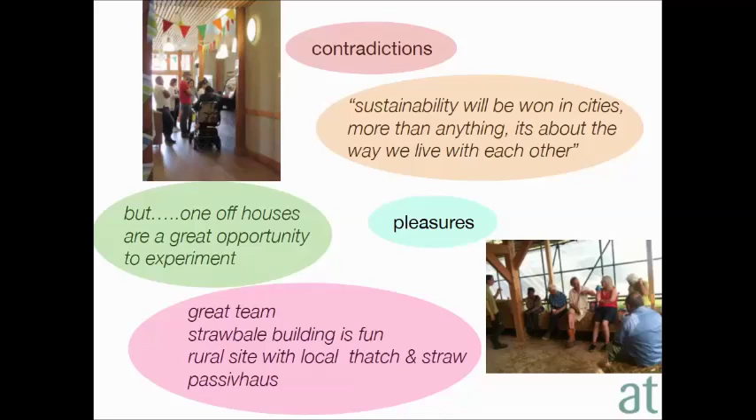And the pleasures obviously are that I took it as an opportunity really to work with all the people that I'd grown to know over my years of practice, and so it was very enjoyable working together. Straw bale building, like most forms of building together, if you can allow it to be, is really good fun. And we were working in Norfolk, which is where I've spent a lot of my life since I was a child, and these traditional materials of thatch are really just lovely to be able to work with.

The first straw bale project we did, which is like this one that I'm going to talk more about, was with Strawworks. I don't know if any of you've worked with Barbara Jones. This is a building in Lordship Rec, which is a little park just near Broadwater Farm Estate in Tottenham.

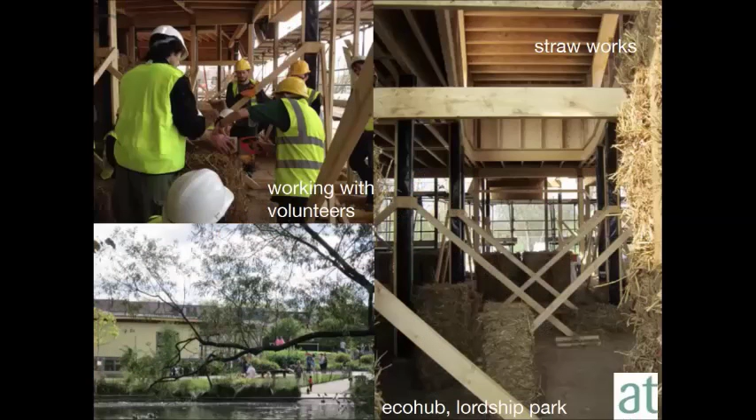And the brief from the amazing Friends group there was to build in straw bale, because they wanted people around the park to be involved in doing the building. And they were involved in doing that. And it was quite amazing to see this. It was a big park regeneration, so there was a very big contractor.

And it was really quite amazing to see how, when the timber frame was up and the roof was on, and these teams of local people came and worked over a period of about a month in week sessions with Strawworks, how the atmosphere on site changed and how many more people came along and asked what was going on, and how much they really got out of doing it, including one of the gardeners on the park.

And in fact, we started with knowing it was going to be a straw bale project, but we didn't know the size or shape or what the building was for. And there was a long process of participation in design as well. And that's something that we've really prioritised over our time of working.

And we found that enabling people to really contribute to the design process can be a really creative process, and that it can take projects off in directions that you really wouldn't have anticipated, and can provide very different and innovative solutions to problems which are sometimes solved in rather dull ways.

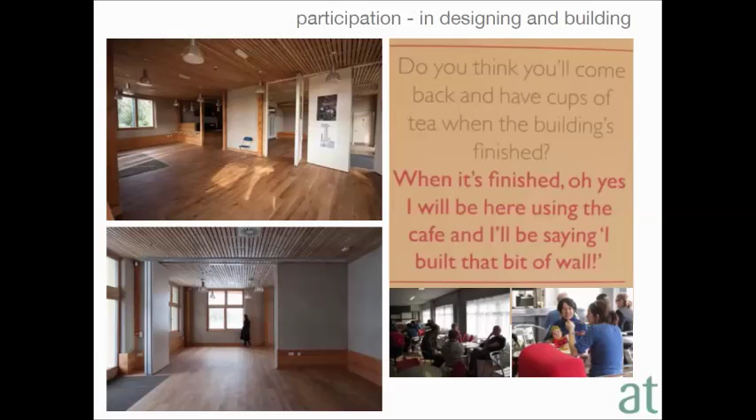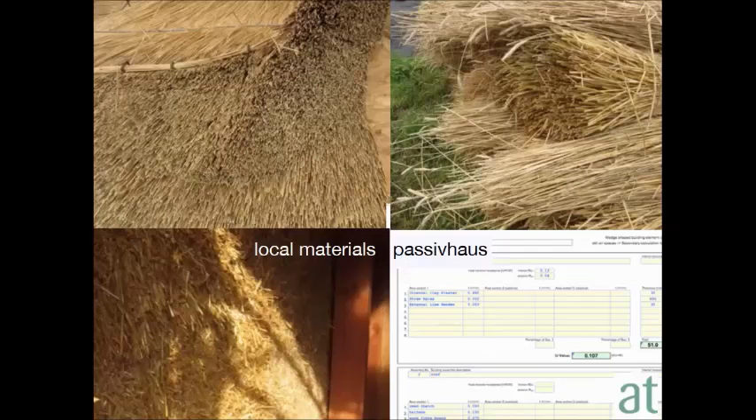Anyway, it was just at this time I was about to start this project, and I thought, right, obviously it's going to have a thatched roof, and this is the sort of buildings around where we were building in Norfolk, and it's going to be straw bale. And we're also trying to work very much within the passive house discipline.

Are you familiar with passive house? Who knows about passive house? Okay, that's great. So what I think is really important is it's a discipline which is looking for how you can manage energy. It's about energy. It's not about other kinds of sustainability.

And you can use the Passive House Planning Package, which is the design tool to calculate the way that you're using energy in the building. It's a fantastic tool. So 10 years ago when we were doing retrofit projects, we were wondering if you put insulation here, what's going to happen and so on. And we said to people, could we model it? And it was too expensive to model, and we had to do it and then measure and see how much energy you'd saved.

With PHPP, you can really explore if you've got a bigger window here and a smaller window there, how does that work? Or if you have more insulation at this end, or if you change the shape of the building, you can really look at what the implications of that are. And it really is a very good informative tool as you're working through the process.

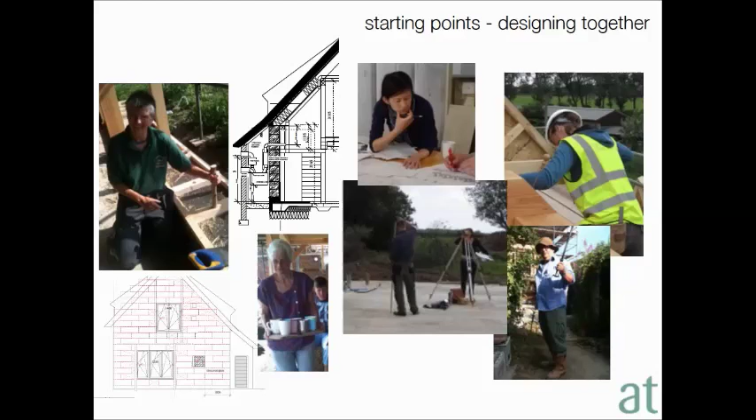Our airtightness consultant was Paul Jennings, who's the AECB airtightness guru. Barbara Jones on the left, our straw bale person. Fran Bradshaw is the tea maker, and Junko is one of the designers at Anne Thorne Architects who was working on it. So it's a very, very simple building.

A primary Douglas fir frame, self-supporting straw bale walls. Some of them are really quite large panels of straw bale. Windows anyway are heavy and need to be in the right place, but once they're passive house windows, they're triple glazed and they're really, really heavy. And obviously all windows need to be plumb and level, but passive house windows really need to be plumb and level.

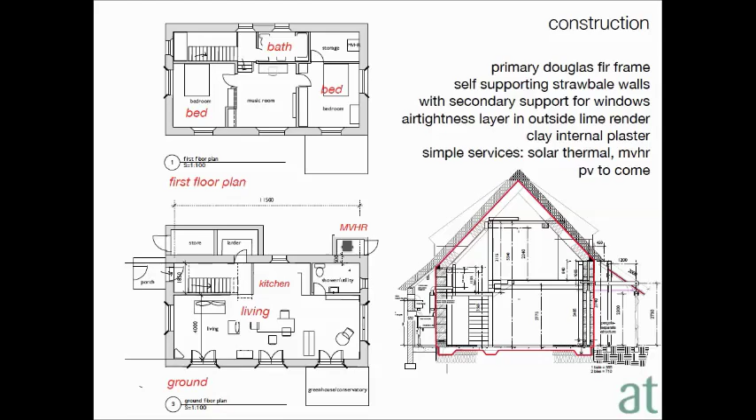Our airtightness approach here was that the outside layer was going to be the airtight layer, and that didn't work very well. We'll go on more about that. And then clay plaster inside and lime render outside, and very simple services. So the work really went into the fabric, but mechanical ventilation, heat recovery, and solar thermal. And this is the timber frame.

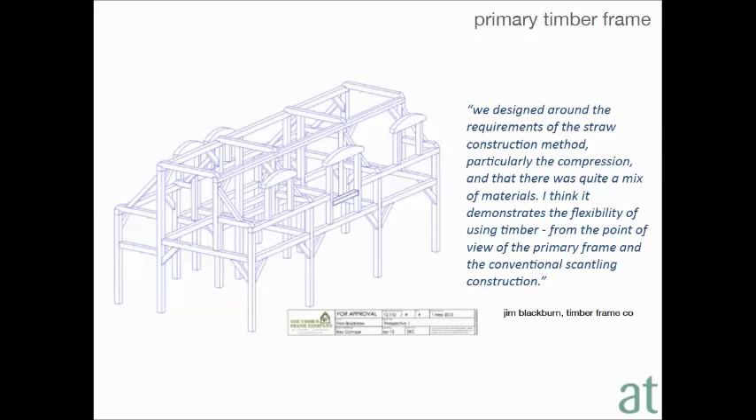So one of the things that was really interesting was working with the straw bale people and the timber frame people together. One of the things about straw bale, if it's not load bearing, is that you need to compress it within the frame. And so what we designed here was a primary frame where the first floor was projected with a compression plate underneath it that we could use to compress the straw bales. It's not until the straw bales are compressed that the wall becomes rigid and substantial.

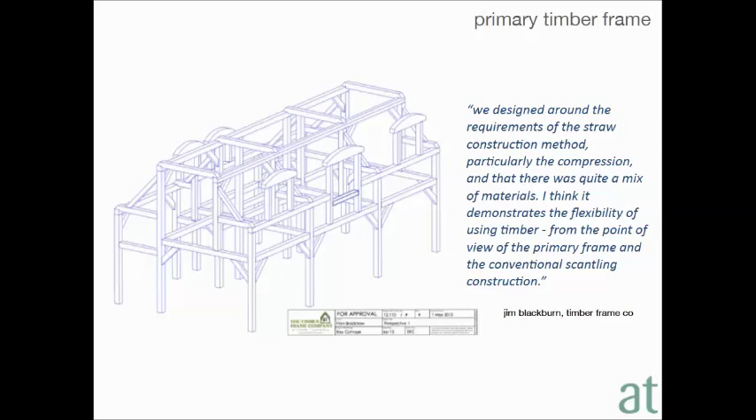And that was quite an interesting new system that Jim hadn't done before, or Barbara, and it worked really very well on site here. And it's been very stable in terms of movement.

So at the same time, obviously, we were developing the PHPP model. Actually, we were really lucky because straw has quite different thermal properties depending on which way it's baled. We didn't actually realise this when we were getting the bales. But as soon as it's explained, it's pretty obvious that if the tubes of straw are going horizontally, then you've got more possibility of conduction through the bales. But if they're going vertically, you've got a better insulation value, and that's to do with the baling machine.

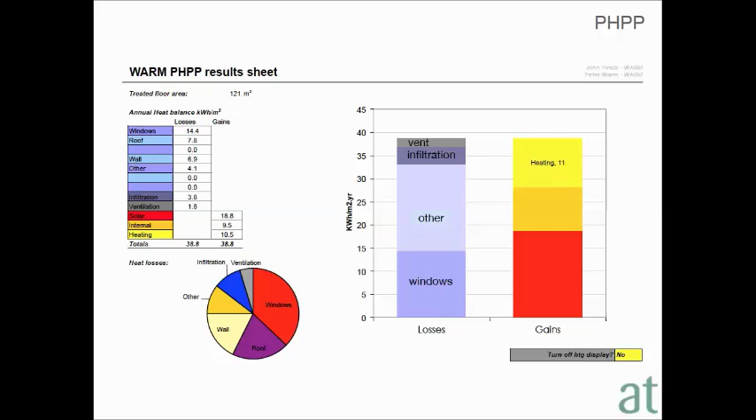In straw baling, the tightness of the baling is actually the key thing. Somebody said to me at Lordship Park, "Oh, is this the really traditional way people used to build?" And I was explaining, no, it's not. A straw bale is actually an industrial product, and it depends on really tight baling. And this is very important when you're building with bales, that you've got very tightly baled straw that you can really compress.

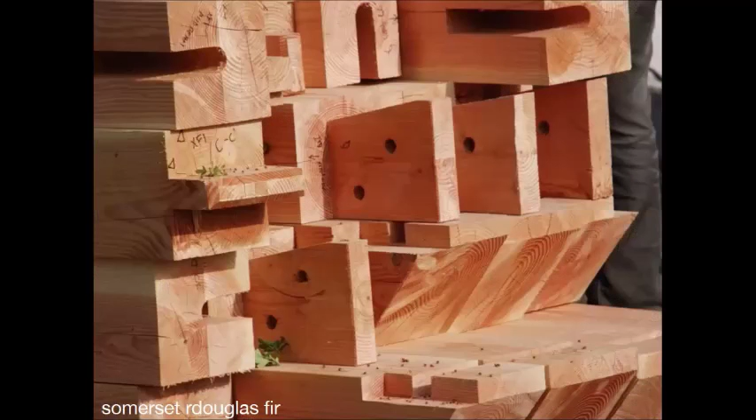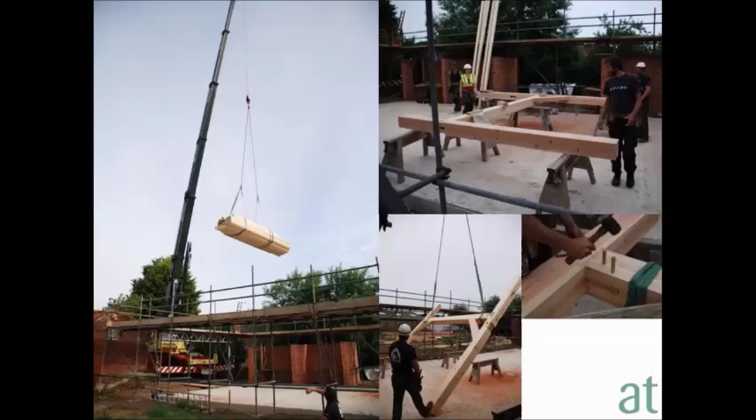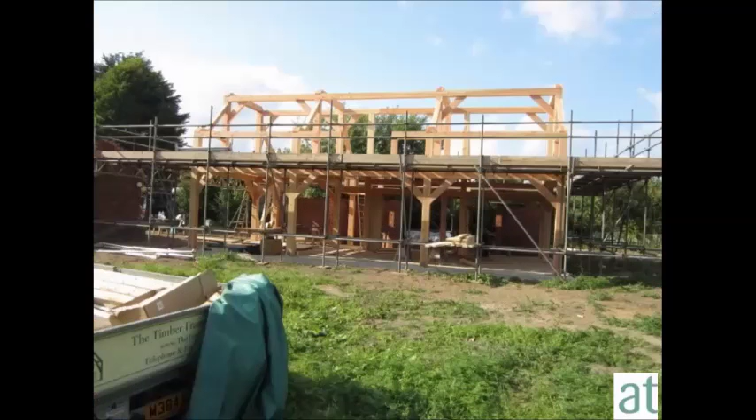This is the Somerset Douglas fir arriving on site. They had cut it and made it all up in the workshop, and then brought it in a big lorry. Here it is arriving with a massive crane. So this very traditional kind of frame making suddenly became very high tech. It arrived on a lorry, the crane went up, and it was really lovely to be part of this process of putting this frame up. And you can see the A trusses for the roof going in there.

And then we had a raft foundation for various reasons. But we wanted to lift the straw up off the concrete, partly because of water damage, really, that it was important to get it up off. And we were here using foam glass, which again is a highly processed material, but incredibly effective in this particular location. And foam glass blocks are actually exactly the same width as straw bales, which is convenient.

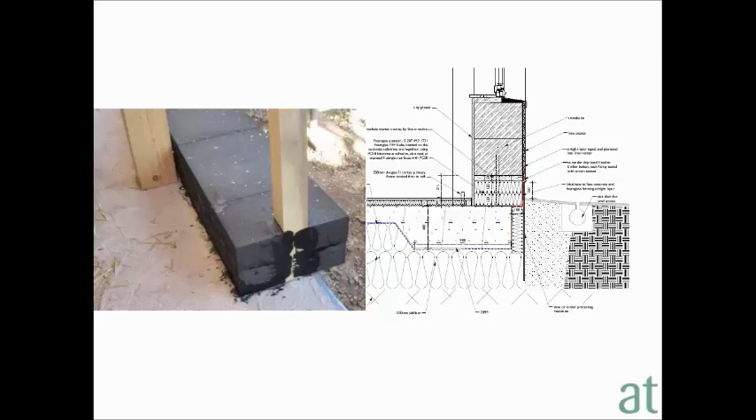And here are the first lot of bales arriving. What we found with the straw baling was that working with a couple of people who are really experienced and know what they're doing, all your friends and family can come and join in, and it works really well. And as soon as the experts aren't there, suddenly everything falls to pieces. So I think that's a really special thing about straw baling, that it really lends itself to community projects and doing it together.

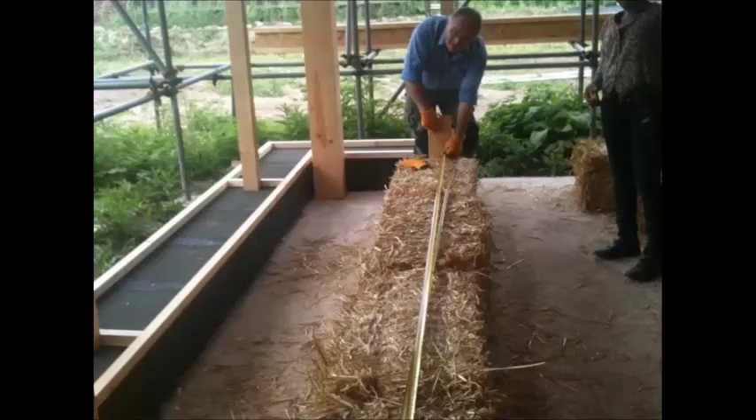Just all the sort of techniques of cutting bales and measuring them out according to a very carefully designed straw bale plan, pegging the bales together. So they're reinforced with hazel pegs down through about 3 bales. On the left, you can see the starter bars, really.

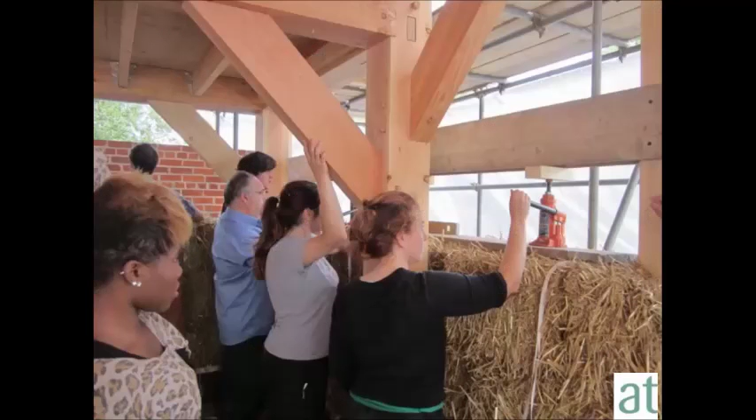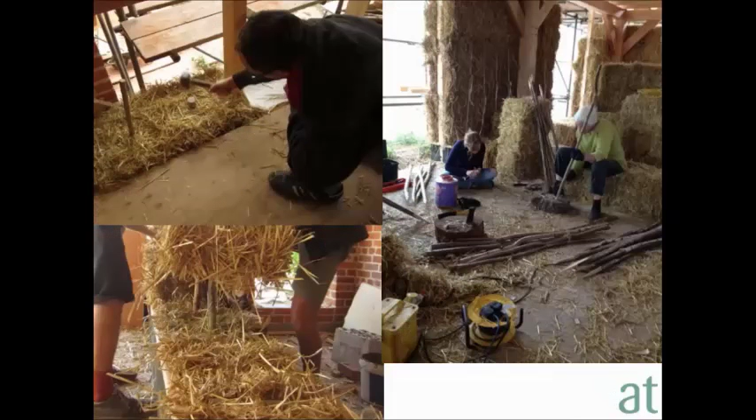And then this is doing the compression. So Barbara just uses car jacks, and you can see in this case, this is sort of halfway up the wall. So she's compressing against a kind of temporary frame. And I think later on you can see you compressing against the expanded first floor roof. The straps are then tightened, and then you can take the jacks away and then go up a bit further. Here we are doing the hazel stakes.

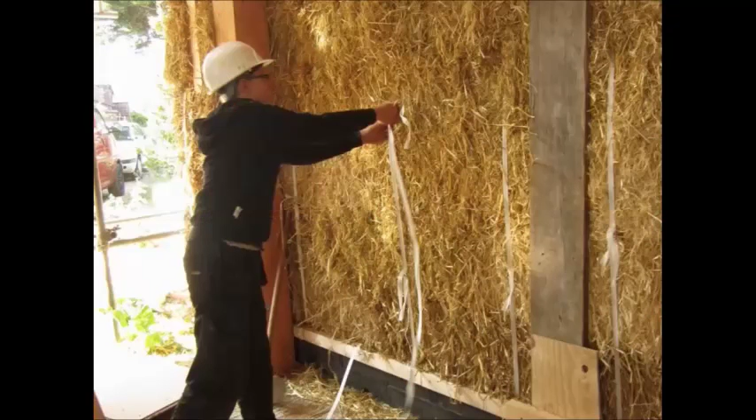And here you can see this top one here, the sort of lattice of the compression plate, so that's up to the first floor, and then these are the kind of complicated bits, the sort of stuffing in corners, and it's a highly technical matter that we had to have carefully explained to us. It's taking the straps off.

We've put little monitors in the straw bale. We don't really know enough about how straw bales really function, and particularly we don't know enough about moisture and how it passes through the wall. And the AECB uses an Omnisense hygrotrac system, which is now being used across a range of different projects, so that we've got very comparable data. This is the only straw bale one that's being monitored at the moment, but across other projects. And so we put the monitors in various different places in the walls and on different orientations. And that's been giving us really useful information back about how it's performing.

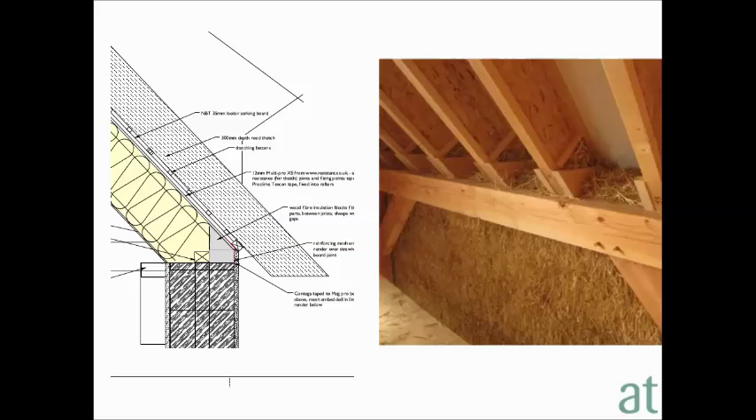And so these rafters were filled with paper fibre, and that's a really nice, straight connection from wall to ceiling.

With thatch, you have to have a fire board underneath the thatch. It's a different way round, really, from how you normally think about fire. And so what was important here was to be able to use the thatch for its thermal value. It's got quite a significant thermal value, but air needs to be able to pass through it. You don't want any kind of condensation in the roof. So these calcium silicate boards are vapor permeable, and what it means is that the whole roof construction with the insulated joists underneath and the thatch on top can form one incredibly thick warm roof.

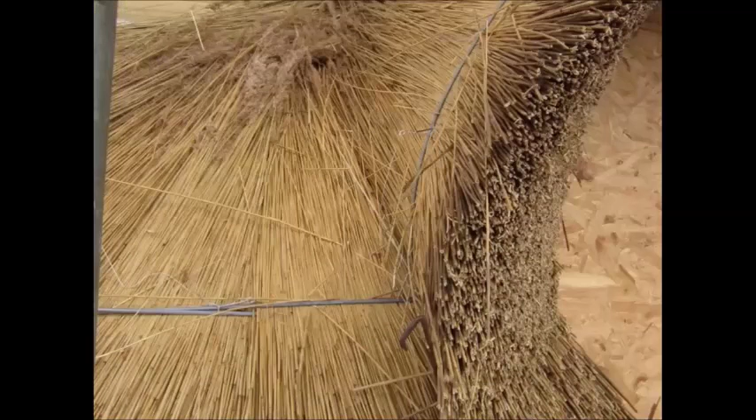And this is the thatcher's tools. The thatcher and the straw bale people were really interested to look at the different tools that they were using, all made for their particular work. And I really thought it was interesting, before the straw was rendered, this kind of shaggy building that came out.

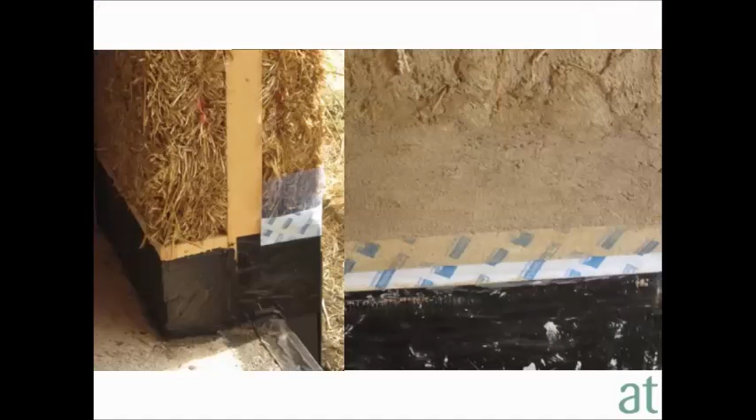This is the kind of where we're going for something which is really quite high performance, and these kind of shaggy materials. There are difficulties about doing that, which was what we were trying to explore, and we did have difficulties. We haven't achieved Passive House because we haven't quite achieved the air tightness target, although very nearly. And that was partly because we had some tape failures externally, and it wasn't really very easy to identify that had happened.

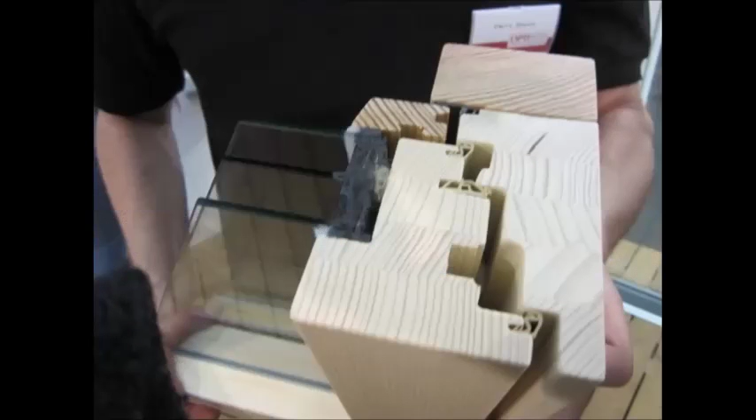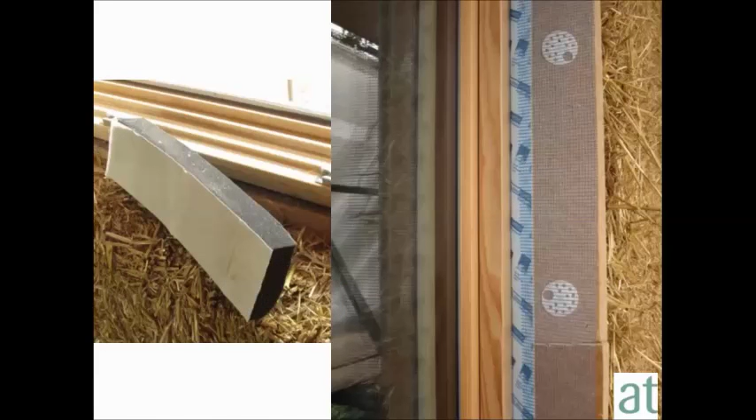But these are the tapes that you would use, and in the Lordship project, we did the same system but internally. These are the tapes that you'd use where they're rendered into the plaster on the inside, or in this case on the outside. These are the triple glazed windows. And you can see again these compression foams, so all the details around the openings are very carefully detailed. And the layers are built up, so you've got insulation over the window, so the frame is actually in an insulated rebate.

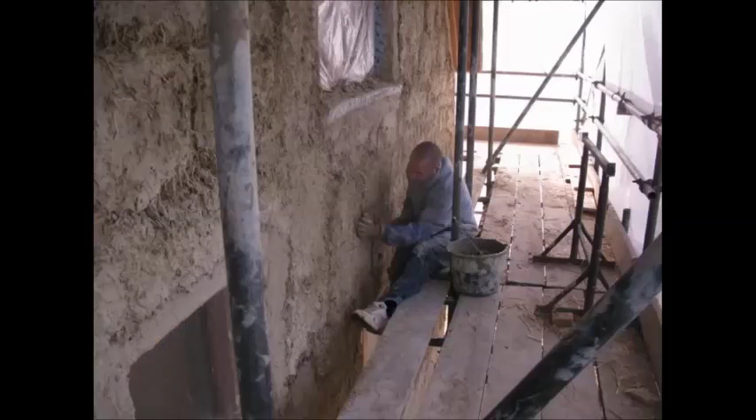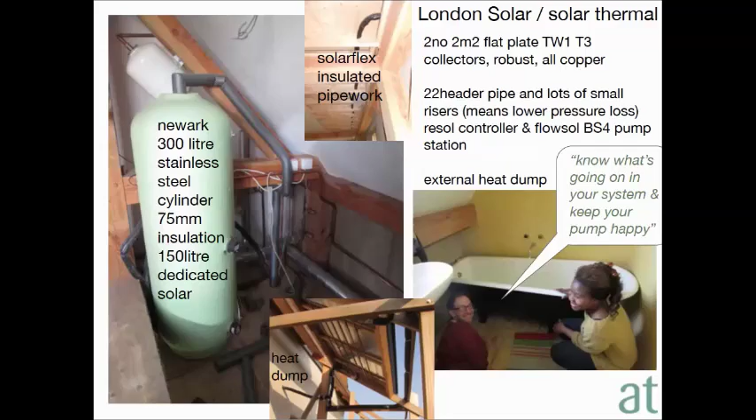And then you can see the layers of render going on, the Warmcel paper fibre being pumped in. This is just solar thermal on the south side, and a heat dump that we'll see in a bit. And then a very simple MVHR system, which was designed by Green Building Store, very economical and works fantastically well.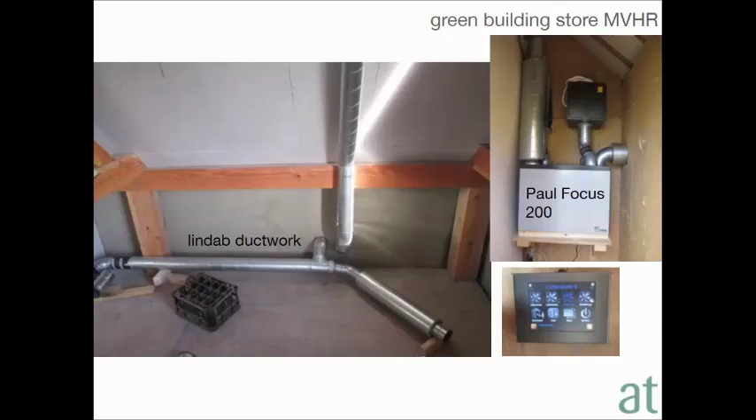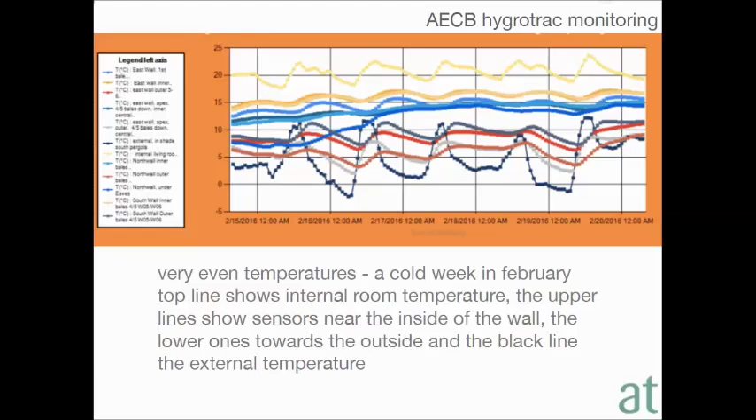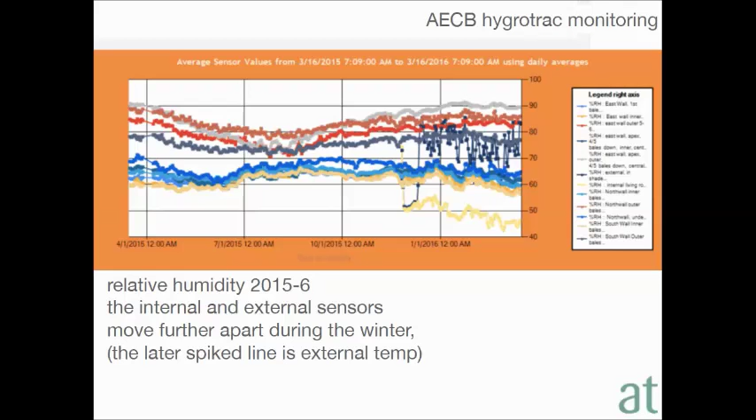Very stable temperatures. And the relative humidity you can see going right down in the summer, and what's been very obvious here is the increased humidity you get during the winter from external rain. Where the temperature is low, that's not a problem because you don't get mould growth in straw below a certain temperature. But if it stays moist for a long time and the temperatures go up, that's when it could be a problem. And that's one of the things that we're really interested in seeing more about.

So the thing that I've been most interested in, just being there, is exploring a bit further these qualities of the space. It's one of the things that we found in some of the other projects we've worked on using more natural materials: you get a very different quality of quietness, not that the acoustic is damped, but there's a sort of tranquility in the space, and that's something I'm particularly interested in exploring further. And this project has been a fantastic opportunity to see how that is created and built up.

That was fantastic, Fran. That was real inspiration. Have we got time for a few questions? Oh, well, no, okay. Well, let's do one. Who's got a question? We haven't got many questions today.

You mentioned that there was a difference between the thermal abilities of straw, where it's baled in different ways. Do you have any figures for that? I do, but not off the top of my head. I think it's the difference between 0.38 and 0.42 or something like that, but I could be wrong. I'm very bad at remembering figures. But it's significant across the whole building, yeah.